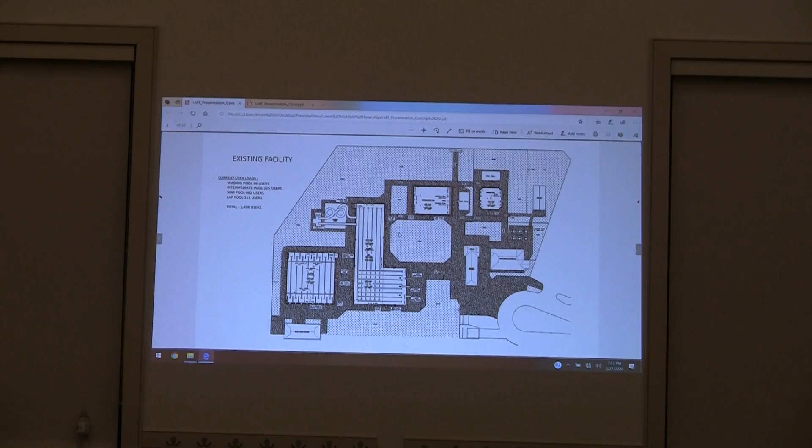Okay Thomas, you want to? Here's your existing facility. I may ask some of the staff to jump in as we go. Currently you have your competition-style pool.

We actually address this one as the Olympic pool, and it's a 50-meter long course with a 25-meter. Yes, thank you. And Thomas, water depth in this pool, we're going from...

Water depth's what's called the leisure pool. We start at 2.6 at the stair entry end, which is on the right end of this slide, and we go to 4 feet on the left end at the center gathering point. Here's your children's pool.

Currently you have a user capability of 1,498 users. On many of your days, your total user load exceeds that number. It may not be all at one time, but throughout the day, you'll have total patrons in excess of that. So overcrowding is one of your issues.

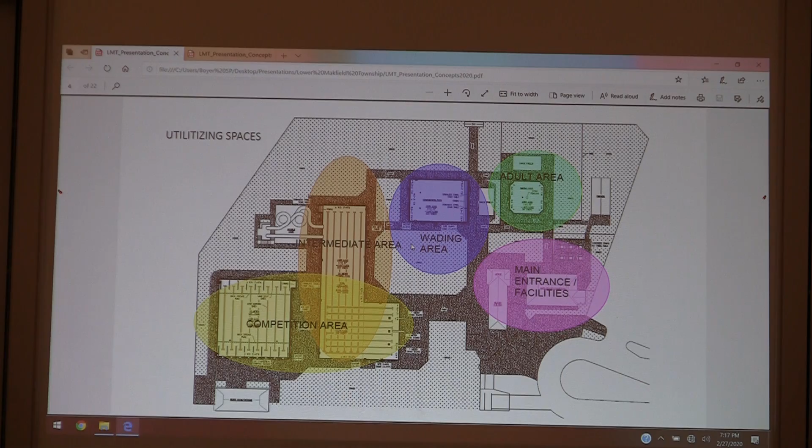Okay, so we'll move on to the next one. So what we were doing here, we're adding into this pool additional lanes. Your pool is already built to accommodate lanes running in the other direction.

So we're using your infrastructure here and just adding additional lanes across, which gives you more options for lap swimming or for competition and so on.

How long is that distance going that way? 25 yards, you have 25 meters now. How many lanes would fit? I think we have 8 both ways, don't we, Thomas? Yes, you have 8 in both directions. Going this way we stopped at your stairs, of course.

Jackie, you look like you want to say something.

We currently have the capability of doing 8 lanes when we run meters, but we don't actually put in 8 lanes because we leave a double wide swim area. By doing it this way, we add an additional lane space, which is one of the things a lot of our adult population was looking for, to be able to swim laps.

Will you still be able to do walking after that? So instead of dividing into adults and families, I'm an adult that swims laps, and I have kids, so I care about both. Well, I haven't seen this either, so let's let them continue.

Is the point of this that we're at end of life on the current pool? Is that why we're doing this? Are we saying that repairing and maintaining the pools is not feasible? I just want to let you know, no one on camera can hear you when you ask questions out of turn, so I want you to understand that. Is there any background to this, unless I missed it?

We are trying to remain relevant. What we know is that other townships are closing their pools because they didn't do the proper maintenance they would need to do in the long term. Our pools are getting older, so we need to review all of our internal, external, and stay relevant so we can continue to have a good membership in the long run. So that's why we started to move forward with this project.

Can I ask just one quick question while you're there? Did we do an RFP for this and get multiple bids?

Yes, we've been working on this since 2017. This was RFP'd last January.

Okay, where were we? Thomas, we want to move on? I have a quick question. In the Olympic pool, the 50 meter, will they lose that 50-meter course because of the inputs of the different activities, or are those able to be pulled out? Like say when the swim team would want to use 50 meter, or there are many adults that sometimes swim that 50 meter.

That's a good point. Thank you, because I forgot to mention that. Can you repeat the question into the microphone? Sure, the question was, are these features in this pool taking away the competition or long course swimming?

These are all detachable. They're tethered to the floor. It does add some movement and a little bit of work that you would have to move them out of the way when you do that. This and these.

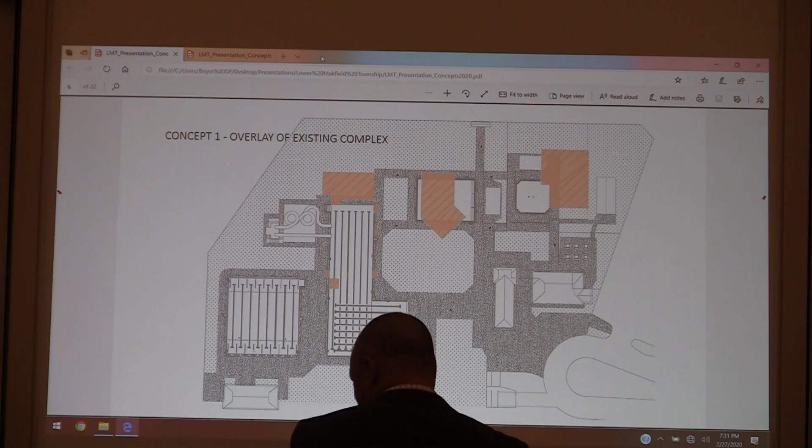As you see on the overlay, there's a large grassy area in the center of the existing complex. If we page back one, that grass area has been taken over by a new concrete deck area, which expands that seating area. There's additional shaded area created in that. So to answer your question about additional seating, we definitely have accommodated that in this concept.

Okay. Concept 3. Concept 2.

Your complex was extra hard to design. We spent a lot of time trying to figure this out, and because we're trying to keep so much of what you have so that you're at prices you can work towards, the next concept 2 and concept 3 don't change radically. They change somewhat in their form.

Here we retained your existing slides, which would save you about $300,000 versus the other slides we dropped in the other concept. And you lost your floatables, moved down to this area instead.

You still kept your water walk. You have the same basic zero entry. This pool didn't change. Here we changed the form of this pool—instead of a larger wading pool, you now have a splash pad on the back.

Does anyone have a question what a splash pad is? Okay, it's just flat pavement with sprays that come up through. There's no standing water. Okay. Kids love it. Yeah.

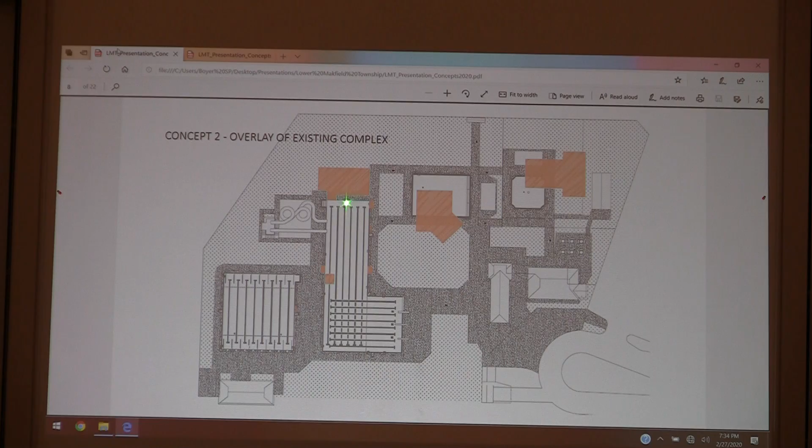You can go to the overlay on this, Tom. Here you can see changes in the overlay. Okay.

Next concept, different layouts again. It was very hard again in this to arrive at these because of keeping in place what you have. You have so much there that most pools don't. Most pools or complexes don't have four bodies of water, and yours is made even more complicated because they're all on different levels. So to stay inside your footprint reasonably and meet the mission goals we had, we have varying designs on these.

Here you got rid of your large slide altogether. You have the fatter family type multiple person slide, and we'll get to these photographs in a minute. Splash pad on the side, and again a different configuration for your other pool.

Let's go to the overlay of that. You can see the difference in the footprint again. Then go to concept four.

What we did then here is the addition of this type of, it's a FlowRider pool. We got rid of your addition to this pool and replaced that with, do you want to jump to that slide? That's this type of pool added in.

Okay, let's go to the features then, because I know you all have more specific questions and comments, so we'll try to jump ahead. We can always come back to these.

We have different color palettes. Beauty is in the eye of the beholder with these things. We have a lady who's an interior designer who is very good with them, we feel, but these choices can be amended at any time. Color palette is always subject to change.

Here you can see, around your wading area, you have fencing at different places to keep the kids in place. You can have an option of deck treatments around rather than just your standard concrete decking. They're colored and textured. Some people call them cool deck, this is called sun deck. It's different colors and palettes, and it's very easy on your feet.

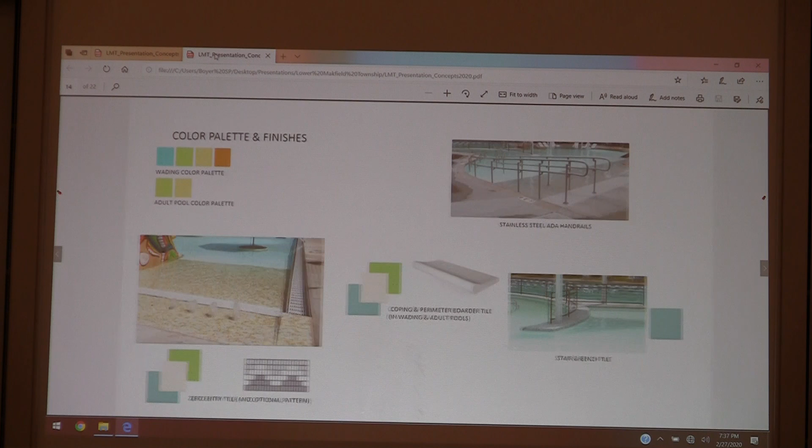Throughout the complex, we had different shade. These are shade kite type sails. You had sails over the adult pool and sails over the wading pool, because we actually have a lot of pools where attendance goes down when it's really hot if you don't have anywhere to get out of the sun. You get a little older, and I can testify that you don't want to be in the sun quite as much as you did before.

So here, this is what your ramp down to your wading pool would look like. It's beach entry. You have the different style slides and so on that would go in there.

These are in your adult pool and your larger pool. Your handicap ramps down are adjacent to your beach entry. In a wading pool, you don't have handrails. It's part of the code that wading pools do not have handrails. It's purely beach entry, and the basis is that kids want to play too much on them. It's not age appropriate.

The benches that are built into some of these features have tile and separation barriers in the other pools so that you keep people more in place, where you don't want kids crossing over to deeper water and so on. You use these types of things.

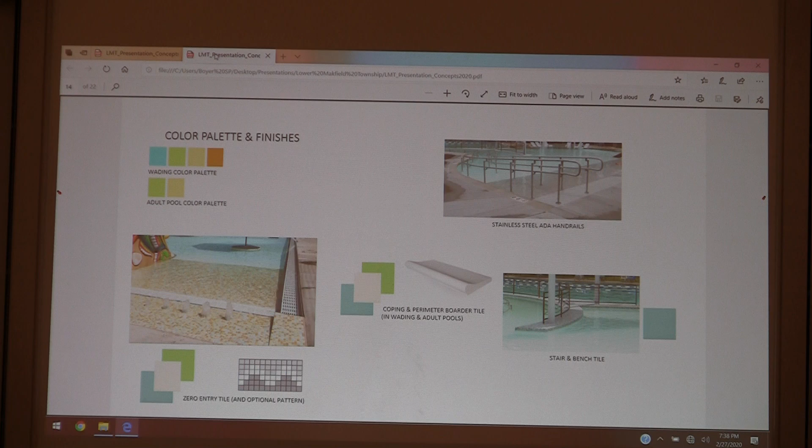Go ahead, Tom. In the adult pool, we have a lounge shelf where this is what you would lay on. We're often asked, do people fight over these? We haven't ever had that happen.

People tend to be civil, the guards and so on. We always tell people you don't want to get everyone in the habit where they go there in the beginning of the day and lay their towel and think they own it all day long. Everyone has to be a little civil, but they work pretty well.

They're very relaxing. In the adult pool you have in-water loungers, and also wall sprays. It's relaxing to hear the water and see the movement, and it also helps churn the water, but they're decorative and nice, and you can walk under them if you're an adult. They're just very pleasant to be around.

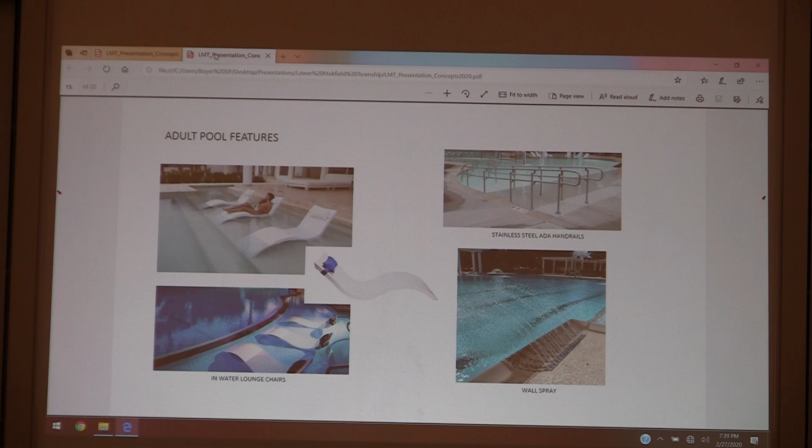In your wading pool, you have a family type slide, so if you're a parent or grandparent, you can hold your toddler and go down the slide into shallow water. Again, you're in 18 inches of water here, and all of these are actual pictures of pools we've done. So here you have steps down next to it, and benches where you can sit. You would have shade over yours, and more wall sprays.

On the beach entry, you have bubblers and play features. These are foam rubber with a vinyl skin over them. They're very resistant, very hard to damage, and there's a lot of things for a lot of kids to play on and do. Then the lounge shelf in that pool, you sit more upright in the wading pool so that you're up watching your kids better.

What we're calling your intermediate pool, your large L-shaped pool, you have these tall features in that addition area. This is that fatter slide you saw, more wall spray, and these are the floatables. They come in all different sizes. They're actually hard to get on and stay on - they're a challenge, and kids love them. Adults love them too.

This is the type of slide that's an option to keep your space open. Whereas now you're losing space because everyone's discharging into the water, with this you can discharge into your own run out.

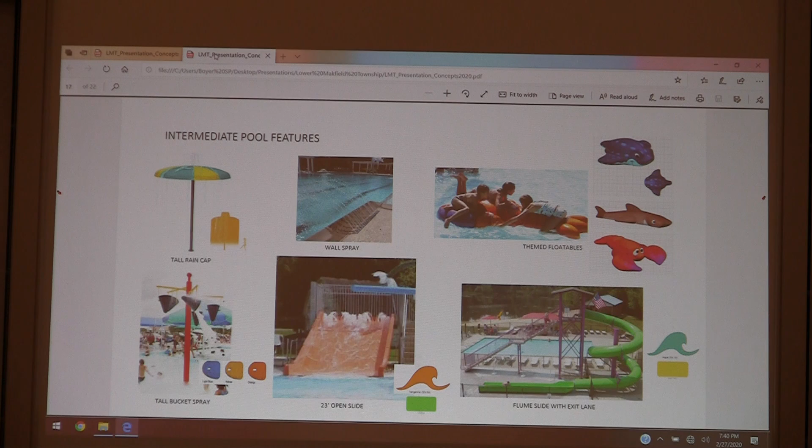This is the water walk we were talking about that stretches across that L-shaped pool. So you try to stay on these - they're tethered to the floor with stainless steel chains with just a clip. You just unclip them and you can move them out of the way.

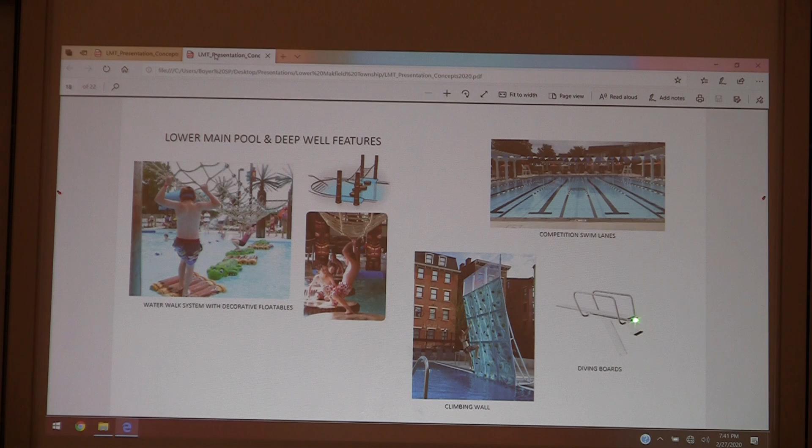You try to hang on and make it across, and that's a lot of fun. There's a different version of it. All these things are themable - you can come up with a theme, whether it's animals or flowers, or mix it up. Climbing wall from the deep well - we're keeping your diving boards and the competition style lanes.

And then the flow rider, which you saw, which we wanted to throw in there if somebody had a desire for that. Again, they're really neat, but they're really expensive. I'll say this though - if you went with this next to that pool versus the addition, you're probably at a net gain of about $500,000, because that addition is about $500,000.

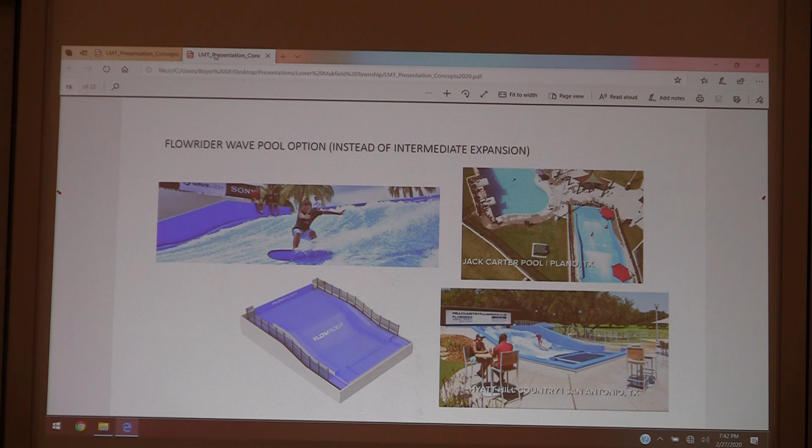And then different site considerations - low maintenance plant barriers, retaining walls, a pergola over the cafe area, different site improvements that you can have to dress things up. Do you want to go back to concept 1?

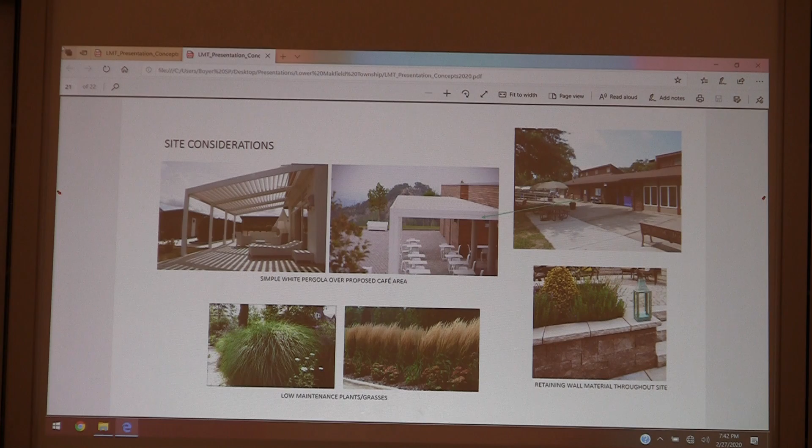The other thing behind these concepts is that you can do them in stages. I'll give you some numbers now.

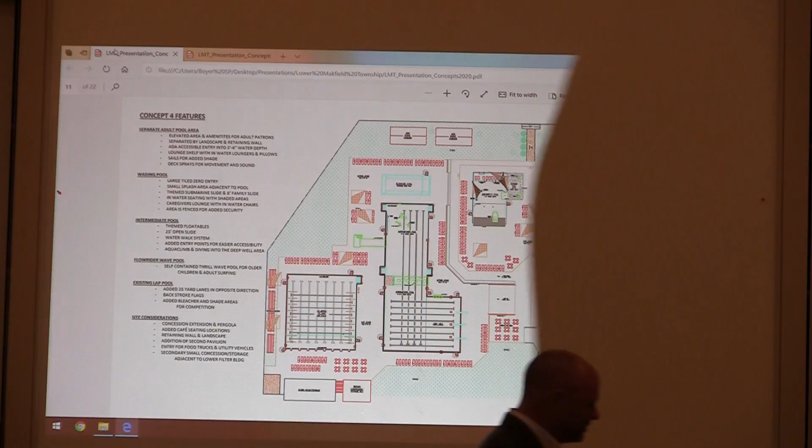This pool - geez, I don't know if I can, you're asking a lot, Monica, to make me do this. This pool, with the bleachers, you're at about $150,000, because you're not doing that much to that pool. If you didn't have the bleachers, you're only maybe $50,000 to increase the lanes, do the paintings, do the other work, and so on. So not a big investment there.

Since you're done with your concepts, can I now ask a question about that pool you were just talking about? Yeah, sure. The one area is deeper, so how will people be able to walk if you change the way the lanes?

Well, you don't have to put the lane lines in - we're not changing the depths. Those are just lines that are painted on the floor. Oh, okay, so your pool, the bottom didn't change at all.

Excuse me, as a follow-up to what she just said - I looked at all the designs, and it appears the lines are going the short width, not the long width that it currently goes. If you're a lap swimmer, you follow those pool lines, that's how you swim. You also use the overhead flags, which go the opposite direction of the lane lines. So is there a reason why in all three proposals the lane lines are changing to the short width and not the long width that lap swimmers and walkers want?

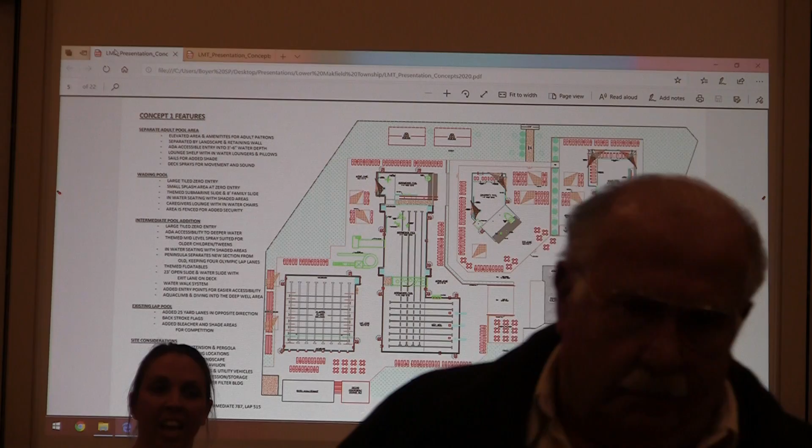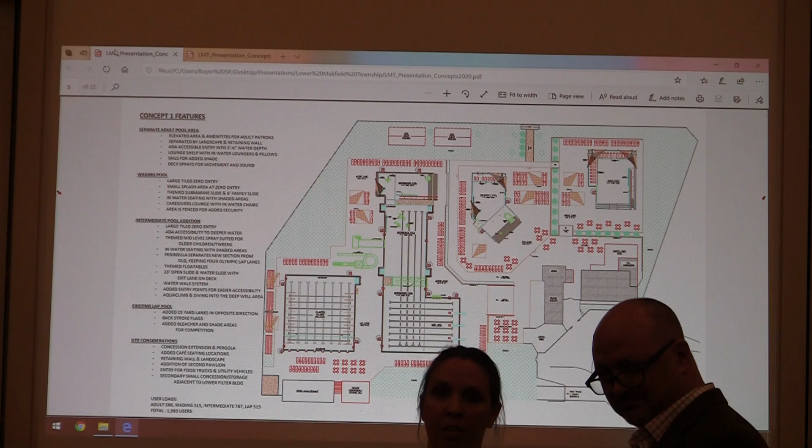Monica, could I just pass the mic to them instead of having them all go up there? Well, it would just - let me go through your numbers before you do that. I'll just finish the numbers? Brent can finish his presentation first.

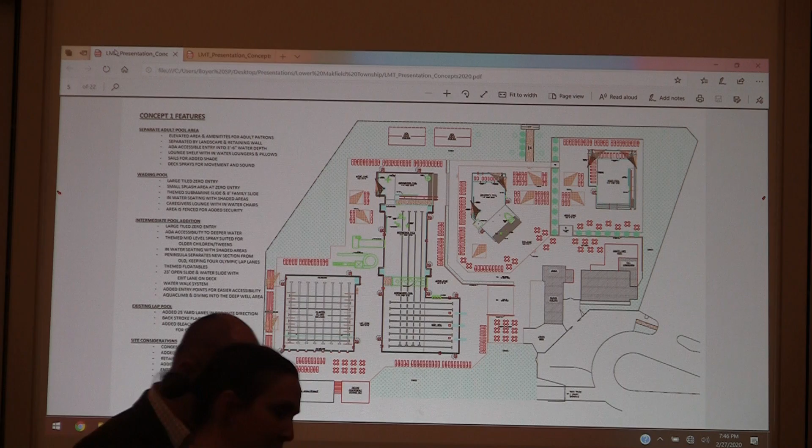So you have food for thought on the costs. I'll go through that. This pool, with the addition, you're at about $800,000. The slides, the two new slides, add about $300,000 to that if you go with these slides. Is that the 800 or is it addition to the 800? In addition to the 800.

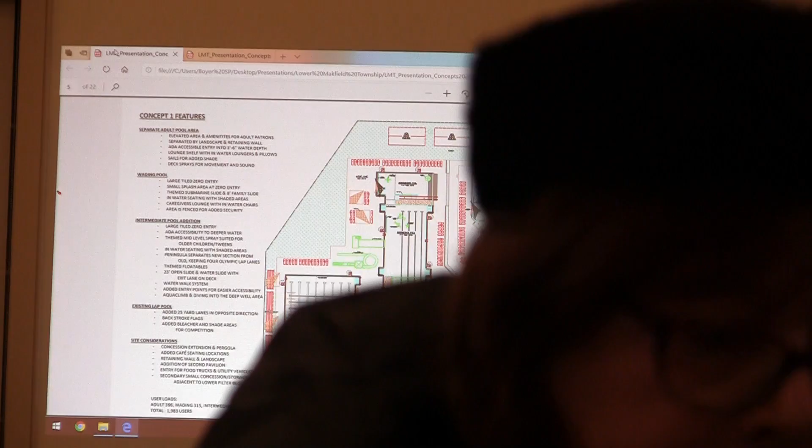This pool, with the site amenities, to construct new, about $600,000. This pool to construct new with the site amenities, about $550,000 - with all the site work.

But the idea behind some of this is that this form of doing the work leaves you options - you don't have to do it all at once. This is meant to be considered kind of a master plan at the end. And again, don't get too emotional about it - these aren't things that are definitely going to be done. These are ideas, and we want to hear your ideas to think them through.

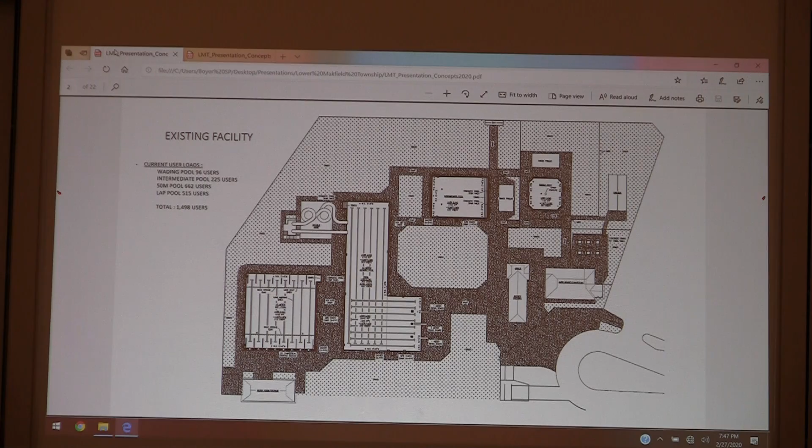Before we give you the podium, I want to mention - Thomas, go back to the existing complex. My pointer's dying, I see. The existing lanes run in here. Go to concept 1 now. I mean, they're still there, we didn't change them, and we didn't change the pool. We added these across, so they're just painted lines. Unless the staff puts the ropes in - and this was actually a requested feature - we added this ability to go this way. So you can still use it if they put the ropes the way you did before. We didn't change that.

Starting blocks and everything stay the same place for the swim meets and stuff? Yes, and that's - I'm sorry?

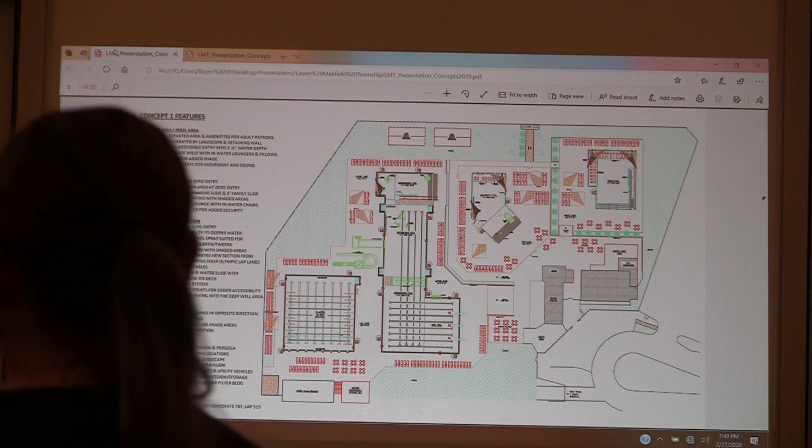So part of the intention behind the design right now with the lap pool and the lane lines going in the direction that they are currently showing using the yards, part of the intention behind that is so that we'll be able to program the shallow end of that pool alone for swimming lessons in the evenings to allow the other spaces to remain open. That's the intention behind it.

So it wouldn't take away lap lanes. It would just utilize that shallow, wider area where we could then put lessons in so that we are not impacting the rest of the pool space, because you are correct, that is something that does happen every Wednesday evening and when we first open on Saturday mornings. So that is something that we took into consideration in turning the lanes for Wednesday evenings so that with swimming lessons we would be able to have them and not take away pool space.

And also making sure we still have the flags going the proper direction for lap swimming, as well as having enough lanes with the same amount, being able to put 2 or more lap swimmers per lane. They're not single lanes, having lane lines on the bottom of the pool, directional lines, as well as the directional lines for meters for our swim team.

Okay, I have a couple of comments. One is, I'm one of the non-resident Lower Makefield people, and from my standpoint, compliments of Cheryl sending the email to me, that's really the only way some of us knew about this meeting. So I would ask that communication be to all of the pool members. I've been a member for over 5 years, so I would hope that I would receive all correspondence.

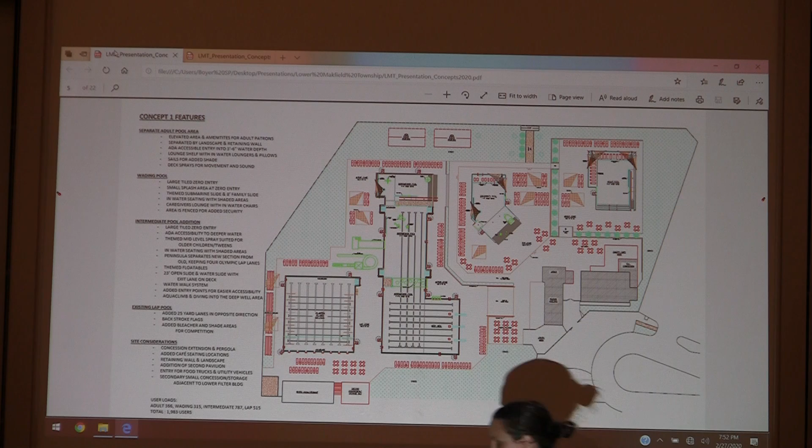Secondly, from the standpoint of being both a lap swimmer and a walker, because I do both, and that is the length-wise, although it seems very reasonable to you all to move it, there was some discussion about that last year. It was very negatively received by all of the lap swimmers. So my feeling is that the lap lanes should remain as they are, because from the standpoint of being a lap swimmer, the number of times you will have to flip in comparison to what you have to do now is doubled.

So it's really not a reasonable thought, and like I said, it was discussed briefly, and I thought that had been put to bed. And from the standpoint, I think that's an awful lot of expense to split the walkers and the swimmers, because there's a lot of people that adults do both walking and swimming, and with being separated from the kids, that's kind of what everybody likes. It's interfering with the socialization.

Yeah, I just wanted to say that if you're separating the lap swimmers and the walkers and the exercisers, you're interfering with adult socialization, because those people socialize back and forth, and as Peggy said, some people like to do both, so you would have to go from one pool to the other at diagonals in the complex. Also, what has happened to the picnic area, because I've seen that utilized quite a bit. It's not something that I use, but okay, all right. But if you could address the separation of socialization between the adults, that's an important thing to me.

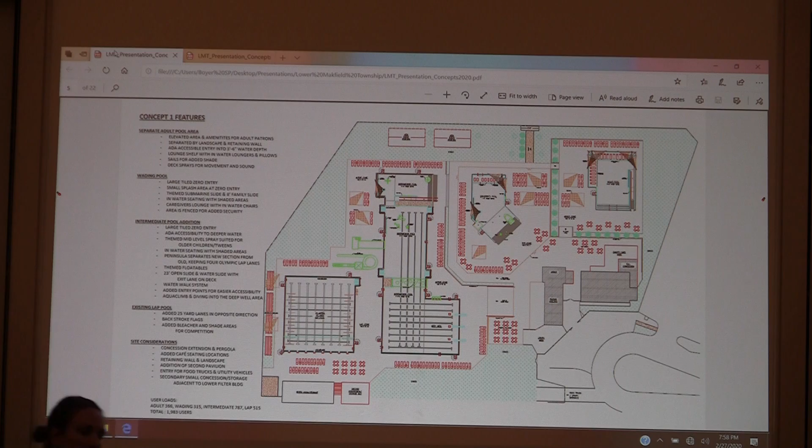Thank you. So first of all, I just want to say I've also been a member of the pool for like 30 years. It's fantastic, it is an asset to our community, absolutely wonderful, okay, so keep it up. I know there are issues all the time, but it's fantastic. I am a lap swimmerish type person now. I've gone the whole gamut from being single to having little kids, to bigger kids, to teenagers that didn't want to go, to adult children that are gone. So now I'm back to lap swimming. But again, the facility's great.

Regarding the lap swimming, I don't think it's going to change anything, but possibly give us slightly more lanes. It's just there might be some confusion - you're 25 yards versus 25 meters, so if you go the other way, you'll have more lanes, but you'll swim 25 meters instead of 25 yards. No, not at all, no, okay. Anyway, I think there's some confusion, that's all I was going to say there.

The one request I would have, if I could, is that what I've seen over the years is there are more - I'll say adults, but I really mean from like 18-year-olds and up - that are not swim team people that want to use the facility for exercise. And it's more and more, and it's a good thing, it's like a wonderful thing. So I would just ask that if that could be taken into consideration, because currently, even when you have the lanes set up, as we said before, multiple lanes are used for other activities, whether it's lessons or something. And in the evenings, I see it actually getting fairly crowded with people in 2 lanes and then people waiting. So it's another great benefit of the pool, is people are using it for more and more exercise, there's more adults there. So if you would just think about that as you go through your designs.

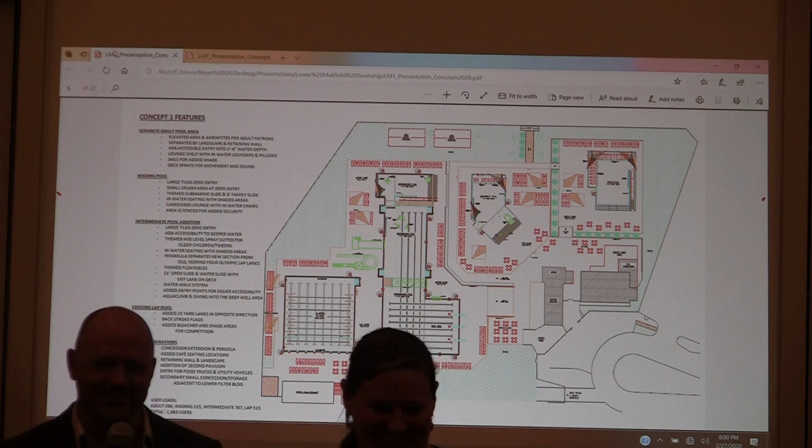Yeah, typically you would do this in the off-season. If you did a piece at a time, you could easily do it in the off-season. If you tried to do it all at once, honestly, you'd have a chance that you'd lose the season because it's a lot of construction to do all at once.

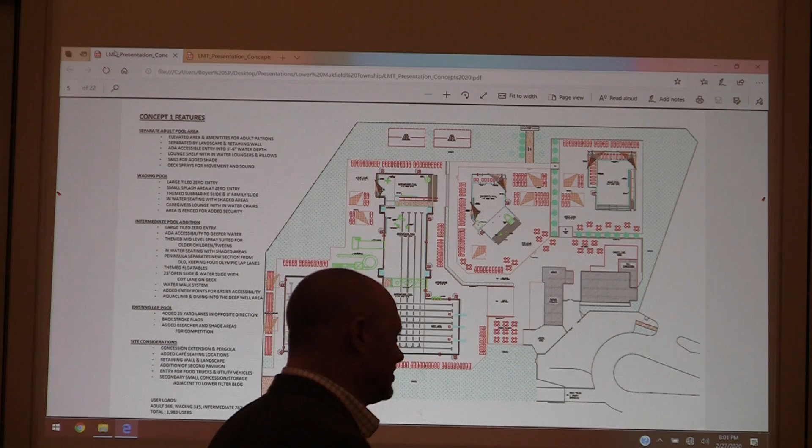I have two questions. The first one is, I may have misunderstood, but there is a cost to the lap pool. I don't understand why there would be any cost to the lap pool at all other than buying new lane lines and maybe flags. That would be my first question, because you're not doing anything to the pool that I know of.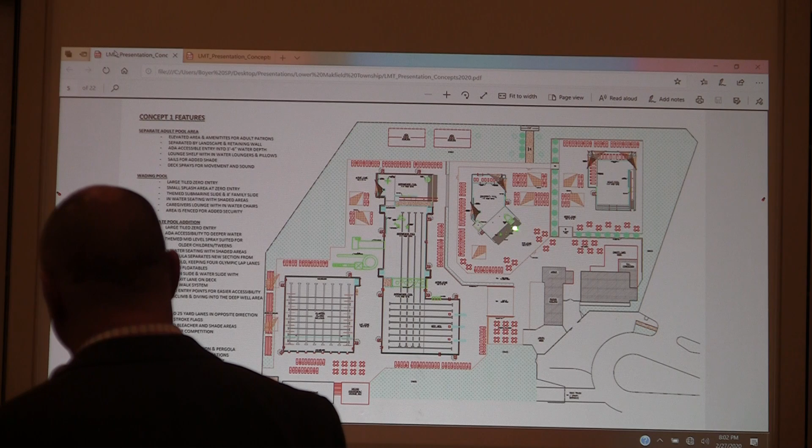My second question is, I don't know if anybody else agrees with me, but we're putting all this stuff in for little kids. We've been members since day one of this pool. Kids came, they played, they made up games, they had a good time. I don't understand why we need to have all of these play things for kids that are interrupting with what adults or teenagers would want to do at the time. The only real things that we're putting in for what I would call kids is this pool. All of these things are for young adults through adults.

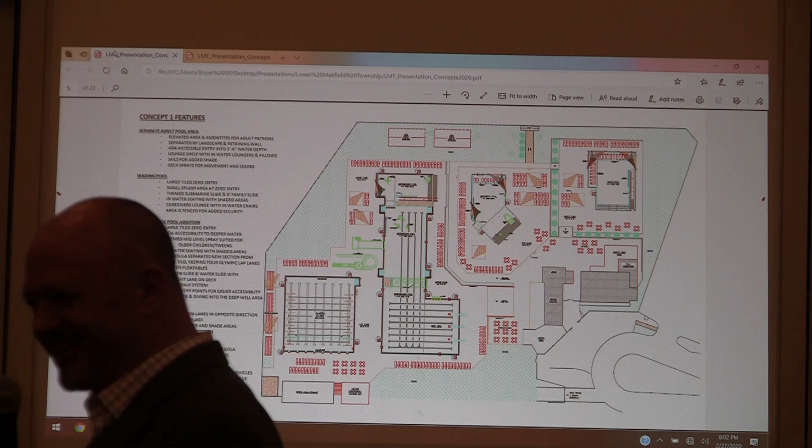You'd be amazed, and when I was growing up that was true, you only had the normal pool with nothing in it, and you learned how to play with that. But the expectation of the public and the things that are available is different today. The old style pool is just a black and white TV set now, nobody wants to go there. I love black and white TV. Yeah, if you're a classic movie fan, yes, that's true. But it's really for young adults through adults, all these other features.

So just so people know all the information on the video, and to your point, it is standard. He's right. We moved down to Dallas for two years, then back up here, and the pool facilities down there, it's ridiculous compared to here. Not that there's anything the matter with the pools, it's just way different.

I think it's a great idea that you've gone out and done this study, but I do have a couple questions. I understand the seating at the lap pool. Does that eliminate then the lounge seating? What about the bleachers? Will that impact the bleachers on the left-hand side of things?

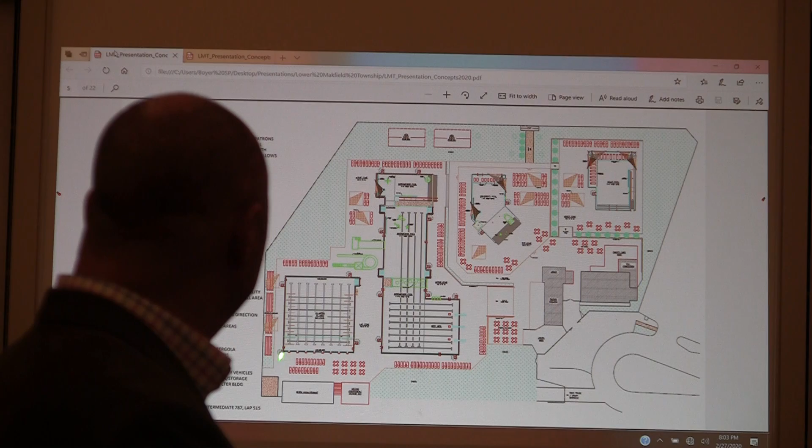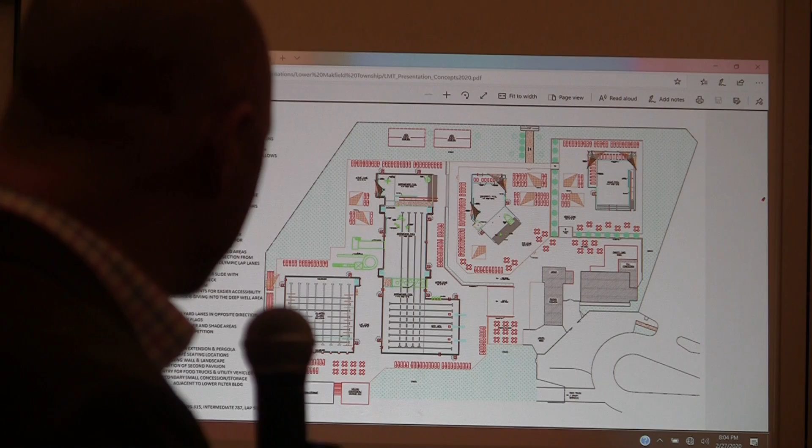Are they permanent? They just moved the lounges to there, you can get either or, because that's where tables and chairs are now that are used on the other side. You can get rollaway bleachers if that's the choice, yes. Everything else around there is that type of seating, but with the competition, that was one of the things we found doing interviews with the staff, and a lot of this is not just our thoughts but the day-to-day problems. During a competition you don't have bleachers, so that was put in there as an option. They could be a rollaway though.

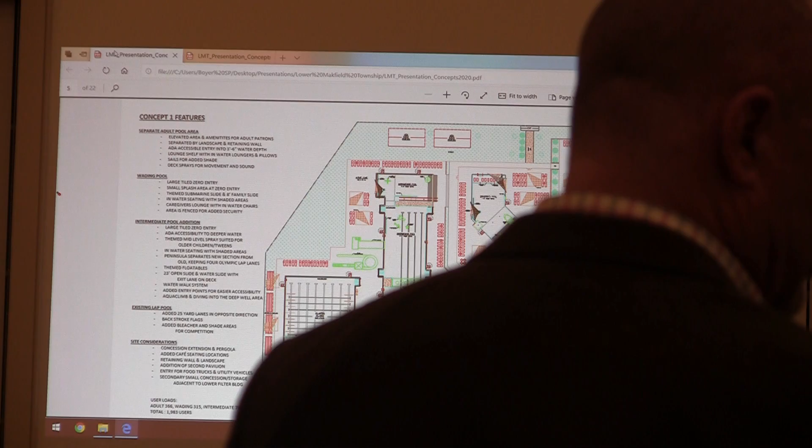I question the whole issue of having bleachers because we have bleachers. When my daughter was on the swim team, when my daughter was a guard there, during the swim meet there were bleachers. Rollaway bleachers were installed. I believe they were four rows high, and they went the whole length of the pool. Are we saying that those were no longer available?

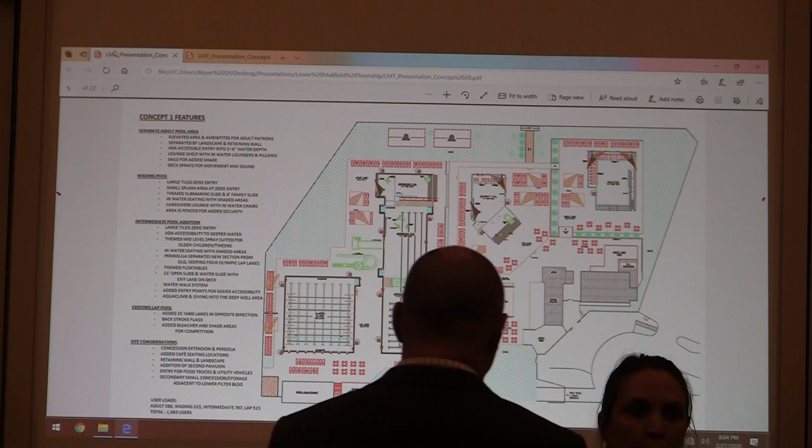We actually pull those bleachers from other facilities to be able to accommodate swim meets right now, so we don't have them assigned specifically to the pool. That's fine, that's the question, but I definitely recall bleachers. There were bleachers. You are not mistaken in that. Yes.

Okay, you had another question. Yeah, I know.

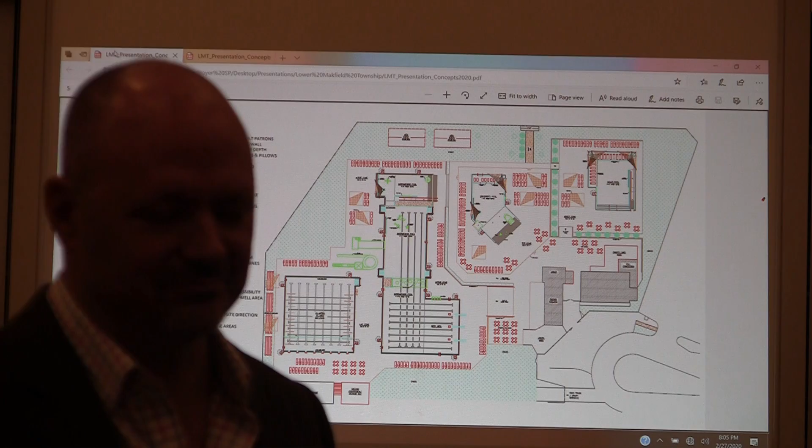I like the idea of some sort of handicap access. This has been something I was very concerned about in the last 25, 30 years. I've been a member since '81, and we lack that. I've seen parents have to dump their children into the pool from a wheelchair, and that just breaks your heart. So I'm glad to see that somewhere in there, there'll be better handicap accessibility.

My concern with the middle pool, to the right, is that the intent of that pool, of the water level, was for that swimmer no longer in the wading pool but not quite ready for the depth of the Olympic pool. I'm not sure that pool would still address that need for the younger swimmer not quite ready to take off into the deeper water.

This addition goes from 0 to 3 feet, which is, your current one is to 4 feet, correct Thomas? Correct. But how big is that? I don't know that I have a square footage to give you to compare. It's not quite as big, but it's meant to somewhat compensate, that intermediate type depth area.

That intermediate pool, I observe it as being heavily used, not only for the kids swimming but any pool. Yeah, it's very, very busy. And the theory is that you're going to disperse those people to these other areas now, because don't forget, the usage pattern is going to change. We didn't feel that we took anything away without giving them somewhere else to go, at least that was the idea behind it.

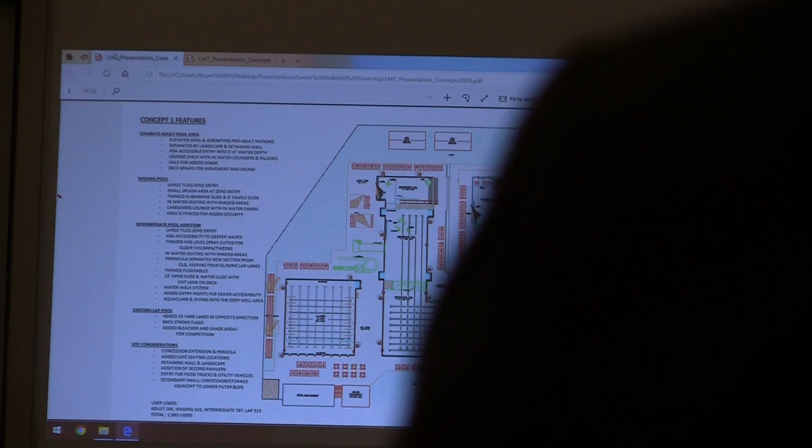In the lap pool, where the steps come in now, will you be making that handicap accessible? Will you be making that the walking lane? I'll let Jackie answer that. And if so, what are you going to do when you want to do your lessons? I'm not arguing, I'm just asking. It's gone.

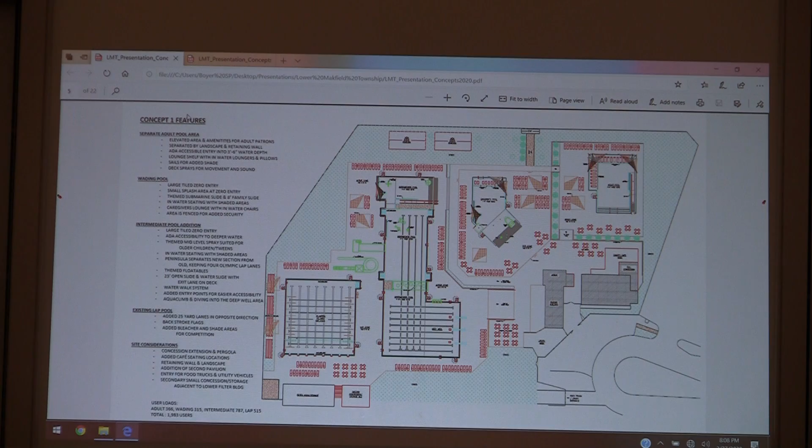So to answer that question, the walking lane would not be where the steps are. That would still be open, just like it shows in the diagram. Would you put it at the 5 feet? I would put it in the first set of lap lanes. So it would never be taken away, even if there are lessons? Nope, it would still remain. How would they access it, though, if there's lessons going on? We would have to figure out some logistical things.

First off, thank you very much for the opportunity. I do appreciate what you're trying to do here in this feasibility study, and you're looking more long-term. But I do have one question, maybe for the Parks Department.

What we're talking here, and you mentioned in your presentation, you were constrained on the limits. Is it reasonable or unreasonable to assume that you could expand the property of the pool? I'm thinking specifically of that one baseball field in the back. Not that I'm advocating that we do that. What I'm saying is if you're looking at a really long-term plan, this sounds like something that's going to be good for like 5 years. 5 years is not long-term.

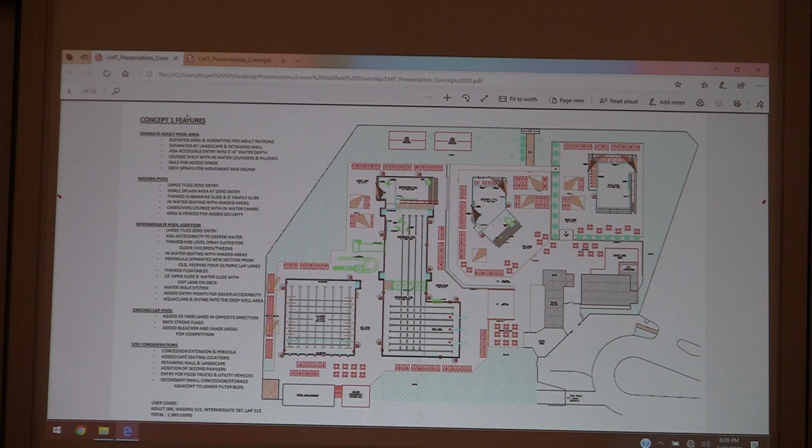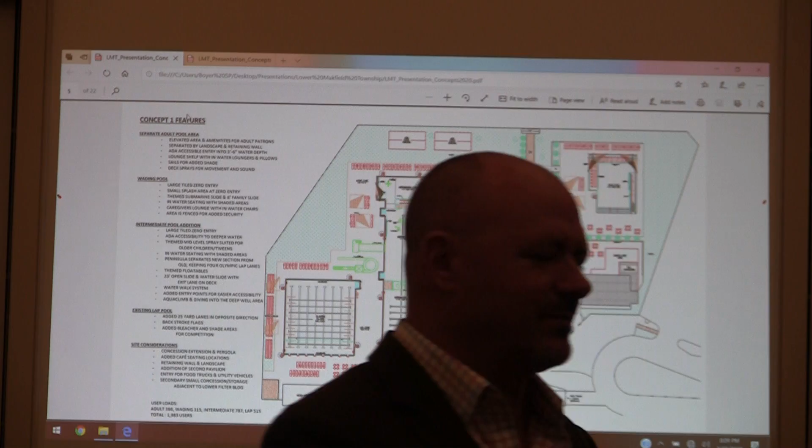I'm looking more like a plan over a 5, 10, 15-year period. You have one baseball field back there, and yes it's used during the girls' competition, but past that it's not used that much. I was wondering if there's consideration of expanding the footprint so that you relieve the constraint on the current footprint that this gentleman was talking about. And by constraint, I didn't just mean the footprint, I meant trying to reuse your infrastructure.

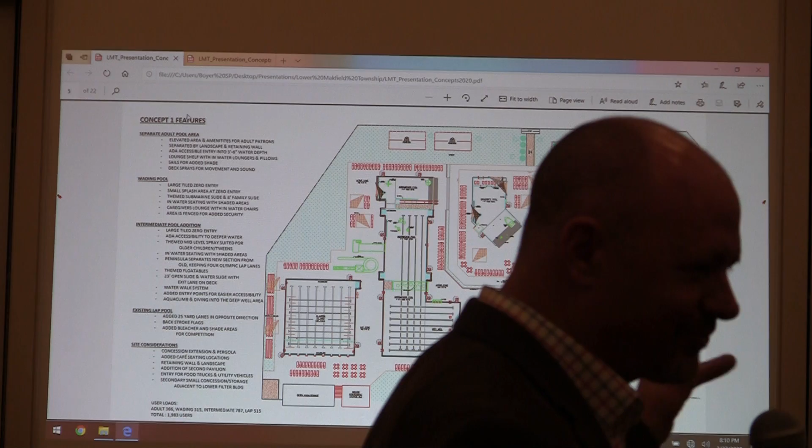The constraint being that the more we build, the more it costs. We viewed this as much more than a 5-year lifespan, but the further out you go, the further away you get from the bathrooms, from the concession stands and so on. We were thinking that we had enough space, but it was also a puzzle to fit it all together at the same time. But as I said, expand the footprint if it's reasonable and the township were to think about something like that. It might create opportunities that don't necessarily exist now.

You have to be very careful. There's some PAA folks in the crowd here.

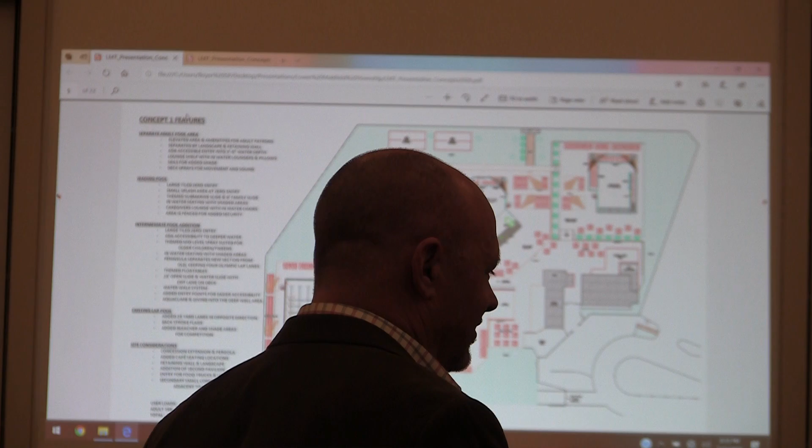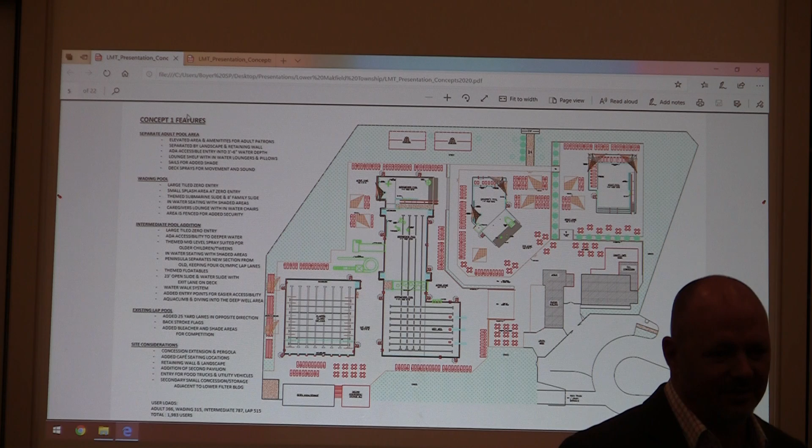I'm thinking out loud from the point of view of long-term planning. I'm not saying it's a final decision, it would take a serious conversation and consideration, but it's something that should at least be thought of. I don't know if anybody has really thought about that, because I didn't hear that. I'll tell you, that field is used more than you might realize. If we were to take that field away, we'd have to come up with another creative solution in the township for PAA to be accommodated.

Fine answer, I just wanted to know if it was being thought of. We are doing a full long-term plan, hopefully in the near future, for the park in general. That could be something that could be incorporated potentially. I'm not sure if it's going to be considered or not, but now we know it's a concern. It is something we had at one time thought about. It has been mentioned by one or two people.

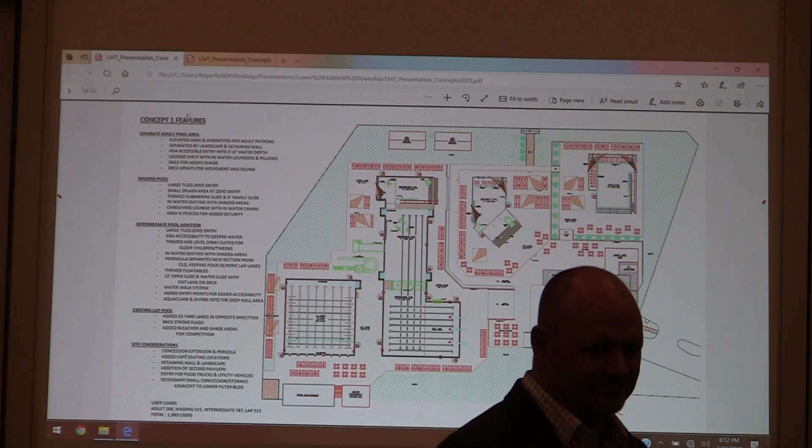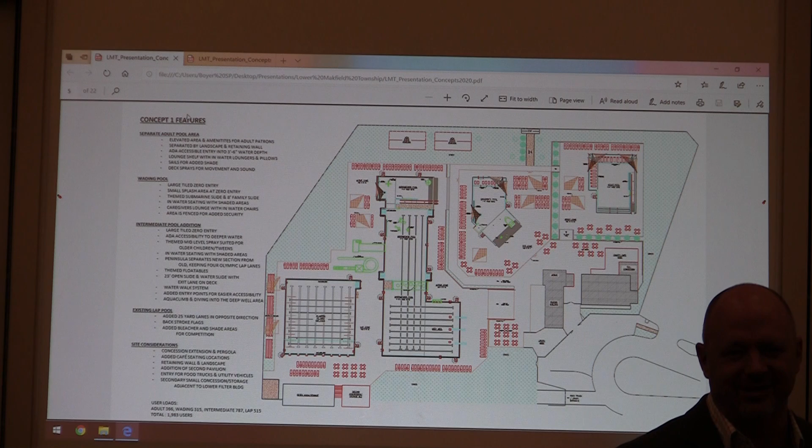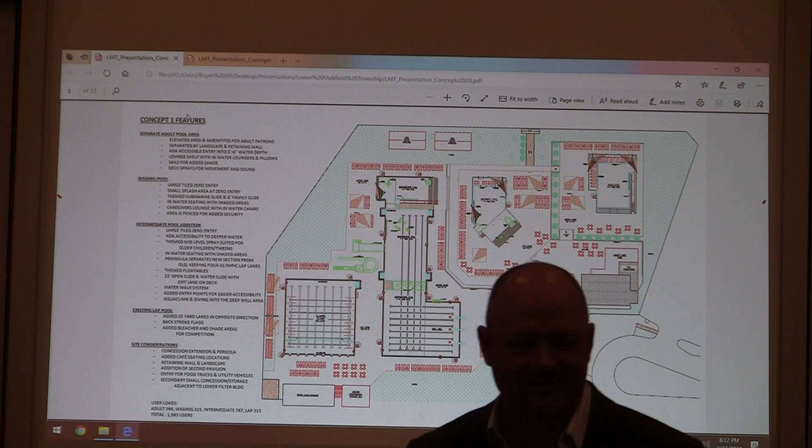That idea was explored in the early 90s when the lap pool was being considered and built. At that time it was determined that because of the lack of fields you couldn't go into it. I think there were other issues too, I don't know if there's a stream back there or something, but there's something else back there that impacts that.

So we didn't feel we couldn't accomplish our mission within the footprint. It was just complex. We never really asked to go beyond it, so we thought we were okay in there. Whether we really accomplished our mission is up to all of you, but we felt we were pulling it off. Hold on, the man in the plaid has had his hand up for quite a while.

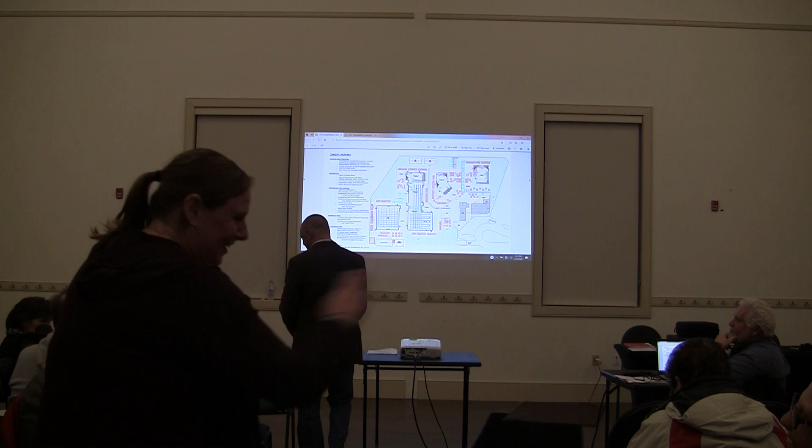I really have two questions I guess. When the swim teams meet, in my experience the last 10 years that's been Tuesdays and Thursday evenings, you basically lose that pool from about 4:30 for the rest of the night. So when we're doing all this discussion about lap lanes, we're talking about two days we can't use it now, and you haven't really given them any other place to go. You can move us, the adults, somewhere else, but I don't think you've addressed that. You've given people some bleachers, which is helpful, but that means they don't go into the big pool area.

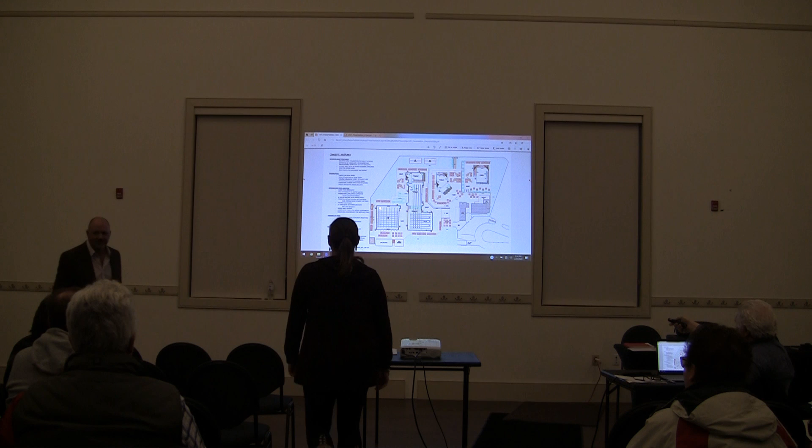My second question is, I'm an avid walker, and it looks like you've put the walking lane pretty close to the deepest end of the current lap pool, which won't necessarily be amenable to a lot of my fellow walkers. Is that the walking area, where that blue line is? No, that's the walking lane, which is your shallow end. Oh, okay, the shallow end, okay.

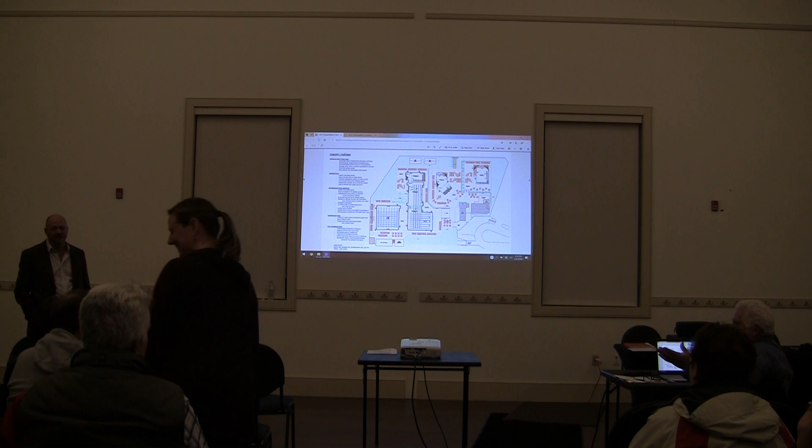Adult pool is 3'6", so it can also be utilized for that. Yeah, I have no objection to being moved to a totally different location, as long as you give the 50 or so of us who like to walk a place to be.

This pool is 3'6", it has stair entrances, you could use it. So part of the feedback right now is to relocate some of the walking over to the adult pool in a 3'6" area, to accommodate multiple people looking to walk at once instead of the constraints of a lane line. The additional answer to the first question is that we will still put lap lanes into the Olympic pool. If we have a swim meet and need a few lanes for swimming, just like we did last summer and every summer before, we add those lanes by closing a diving board and relocating the lane lines into that pool. So that won't change our capabilities. Our new gutter system still allows for the same flexibility in how we program the pool.

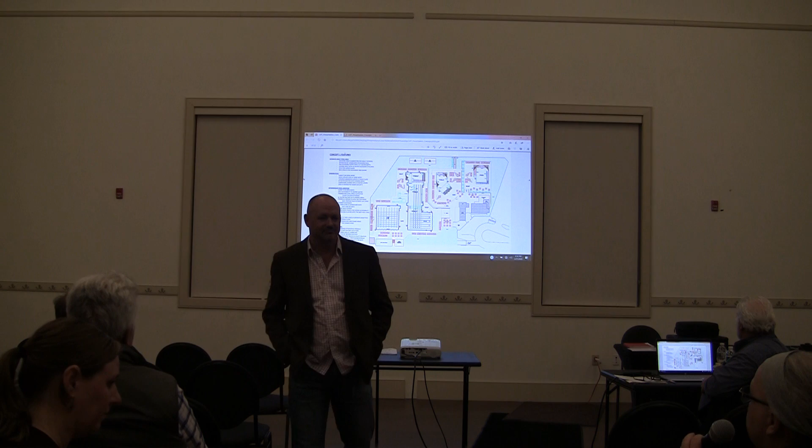A simple thing I've noticed, I've been a member for 25 years: I don't feel we have enough tables and umbrellas for people. You're out in the sun, and unless you have a small child in the intermediate area where there's nice covering, you're out in the sun. I thought that would be an inexpensive addition that would be very helpful.

And that is a big part. We didn't get into counting tables and umbrellas in this phase, but we gave you more deck space, so you'd have the potential to add those in.

Okay, coming your way. Thank you.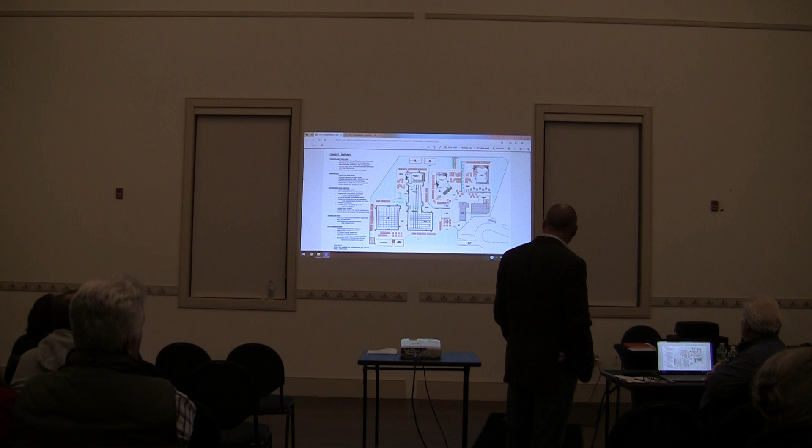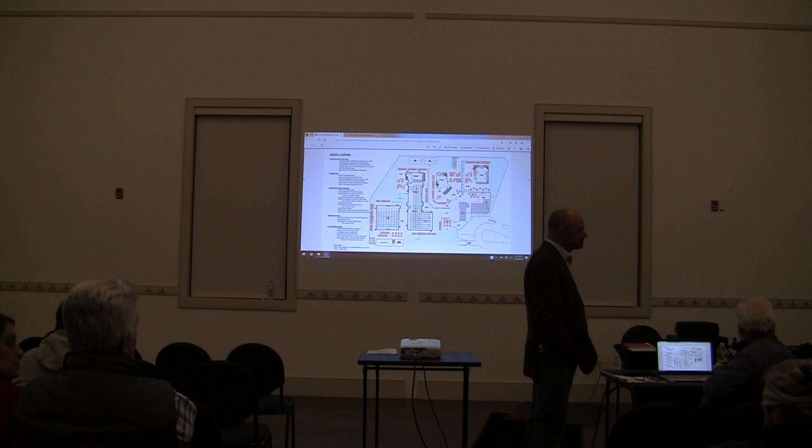I have a few logistical questions. Around the adult pool, in the grass area, today there's a lot of trees, mostly outside the fence. Will those trees have to come down for the sun to get in, or are you thinking to leave those? There's heavy shading from big trees right in that area. Would your thinking be that that pool area will get exposed to sun if it's not today?

I've got a bunch of quick ones like that. I honestly don't know. We might have to take some down. You could probably leave some there and probably replant. At this point, we were just doing layouts and concepts, which trees and so on, and how much sunlight you want to come in. I'm a tree lover too, but we'd have to consider that on a case by case basis.

Is that area still going to be elevated? Is that wall that currently protects the kiddie pool going to come down? Same question for the center pool going to the L — I know you said you're going to pave that, but are you regrading? And same question on grading conceptually, are you regrading back where the new picnic area is? It's hilly, so I'm just curious about regrading across — you're still on different levels, but there's regrading and recontouring going on everywhere around them.

Jackie, where do you want to go next? I'm not keeping track of who's next, I'm just alternating.

Hi, I have two questions and a comment. The first question is, as a little old lady who is always freezing her ass off when she's trying to get her laps in, are you going to fix the heater in the big pool? The second question is, what is this going to do to our membership fees? And the comment is, as a little old lady who's always freezing, please don't cover the pools, I need the sun.

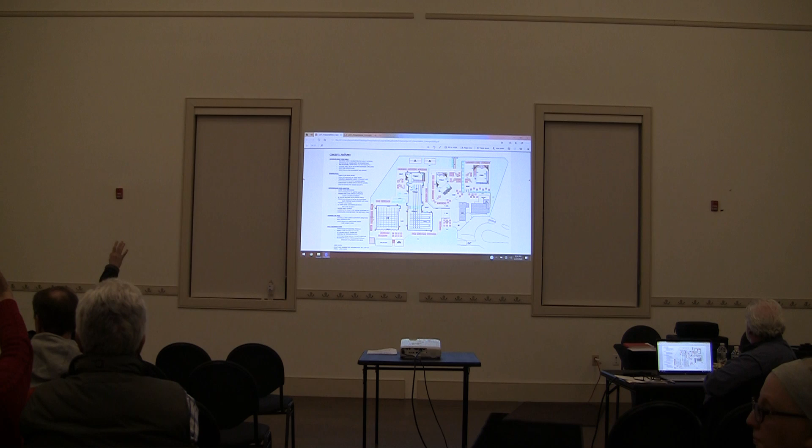Hi. So my recollection, we've had many decades of enjoying the pool, but my recollection is that the current baby pool has fencing around it so toddlers won't stray into some other pool if they're not being watched. So will that new baby pool area be secured to prevent anything like that from happening? That's all enclosed, okay, so that was my first question.

Also, I think there's one person from the swim team board here, but I think if they haven't been consulted, they might have opinions about the long course pool and the lanes and all that, so they have been, okay. I think that's it, thank you.

I'm going over here, go ahead, since it was directed at swim team, I'll give it to you guys. So I am on the swim team board, so I have a vested interest in what's going on here.

First of all, I would like to commend everybody for what they're doing with this pool. I think it's great that they're trying to keep the pool up to date, make some changes. I just wanted to address the concerns about changing the lanes the other way. Collegiate swimming and high school swimming are all in yards. My son yesterday swam 14,000 yards in the high school pool for practice, going in that direction. So you're not doing more flip turns, it's not going to be a major change for you.

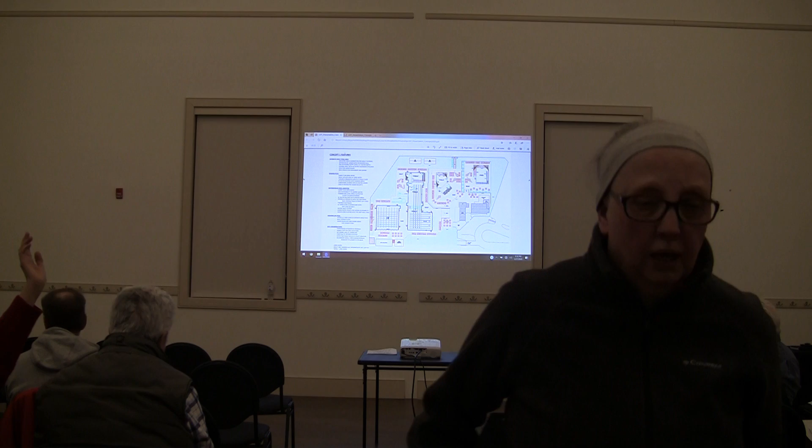Okay, who else? Two more, and then I'll be back over here.

Hi, again, back to the lap pool. I'm wondering what the restrictions are going to be for that lap pool. Is it going to be adults only? Is it going to be 16 and above? We have a granddaughter who needs a little extra care that doesn't necessarily need to be in the ADA pool, but she does need to have an adult help her. My daughter was using the lap pool with her and got into a confrontation with someone telling her to get out of the pool. I mean, she paid her membership as much as everybody else did. She shouldn't have been told to leave.

I'm wondering if there could be something, maybe they wear a special band that they're allowed to be there, something like that. She also wears appliances on her body that, to be in the larger pools with the overactive kids, could rip them off of her body and potentially be a problem.

That's all. So to answer the question, the operations manager, myself, and Monica, the Parks and Rec director, are in the process of streamlining and creating all of those rules for the lap pool. We have not gotten anything finalized yet, so that will come out prior to the pool opening, with structured rules for how the pool is used and staff training on how it's enforced. That's something I don't have any answers for you right now.

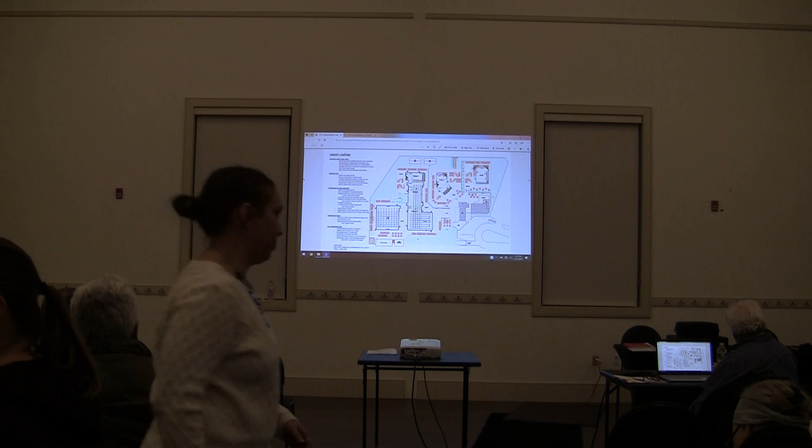Yeah, okay, hi, a couple of comments. First of all, I really like some of the features of all of the concepts, and I think a key point being overshadowed is that we do need to do maintenance and upgrades, not only to keep the facility at the level we already enjoy, but to keep it relevant. As a father of young children, my wife and I are always evaluating the best experiences we can give our children, and a simple box of water is not likely sufficient compared to an area with a lot of amenities focused at different skill levels.

So that's the first one. Second, I really like the intermediate pool being moved to the top of the L-shaped Olympic pool. I think that would have much greater utilization than the Wave Rider. I know there was one comment, I mean that's super cool, I would like it and I think my kids would love to watch me fall on it, but I think the pool itself would get much greater usage, as well as moving at least the tall twisty slide off of dumping into the pool. Which brings up, I know there was one other comment about liability insurance, and I wonder if our insurance carrier has been looped in.

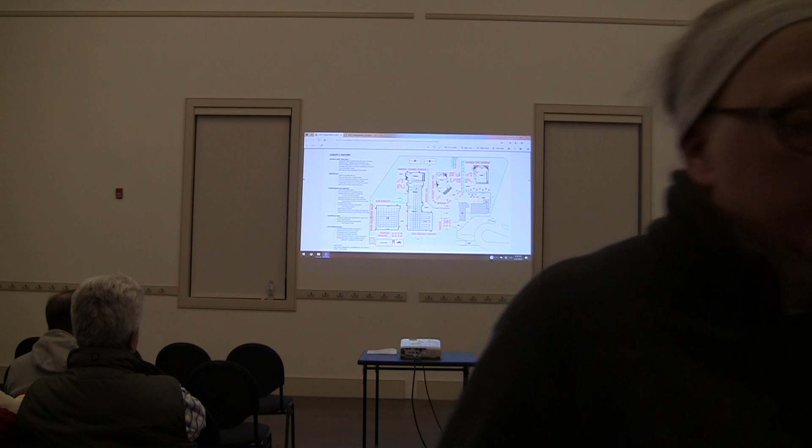Yes, I would love for you to. Thank you for the positive response. And liability-wise, you're really not a big issue, these are common things today. I think I looked at the pool budget, liability in general is really low, like $3 to $4 grand a year or something like that, right? Oh, that's it? Okay, great. If you look at this budget, it shows you all the costs for that.

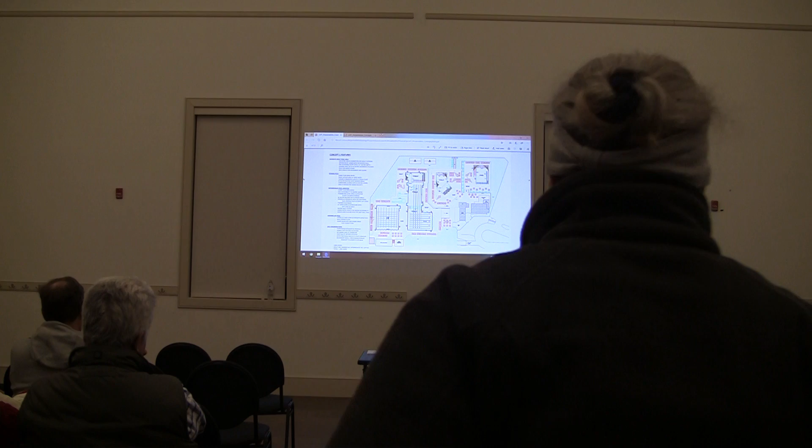Yeah, okay, go ahead. And just to continue on about insurance, we continuously do walk-arounds with our insurer, so they do full risk assessments for us every year. We made some changes this year based on the walkthrough last year. So I just want to let you know that's something that's very important to us. Safety is very important.

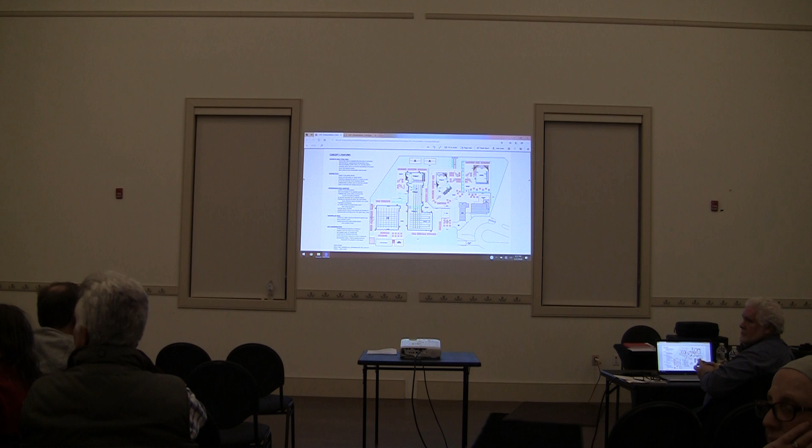Yes, before I brought up the fact that you were separating the adults so that it would be interfering with the socialization of the adults, and I didn't hear any response from you or comment on that. So it is a concern, I think, for the adults who are members.

I don't know how you socialize now, so it's hard to answer that, but I mean, you still got, in my view, I don't know who you sit with or where you sit to talk to them. Because you have people that swim laps, people that exercise, and you're separating them. You're having an adult pool at a complete diagonal from the lap pool, and they're all adults, and they're socializing like they're, people that swim laps come over into the walk lane and tread water after they've swum laps, and they talk with the people who are using walk lanes and treading water and exercising.

So you don't want them separated, they're friends. Right now, we don't have an adult pool. You don't want to add it? You're separating them as far apart as possible. Let's take the adult pool out so we don't. On the lap pool, they're not. On the lap pool, they're still walking, that I know, but your section is still separating the two pools, completely diagonal.

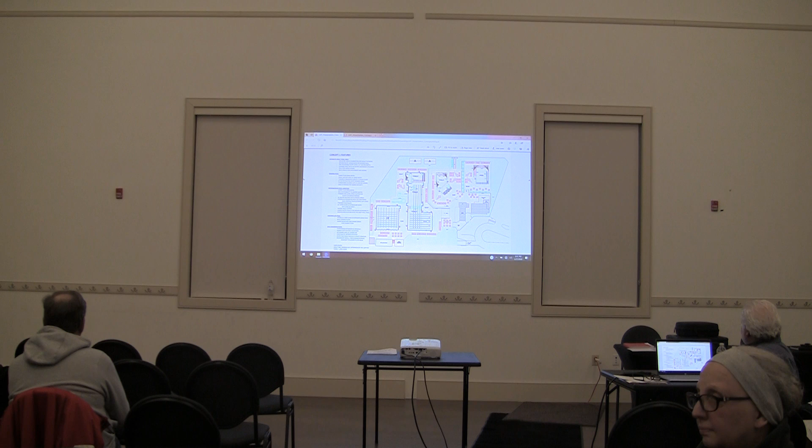So my question is, there's 3 different versions that have been posted, and as one gentleman said, a number of people weren't able to come. I just looked at the Lower Makefield Pool site, and I don't see any of the drawings posted. Secondly, before all of this is finalized, and maybe have additional meetings, but be a little more specific about what the topics are going to be about so people understand. When Cheryl forwarded me the email, I didn't even understand what it was about, and I know a lot of people call it the township.

So to answer that, this was the first unveiling. Right now, I'm the pool manager and I haven't seen it till tonight. It is being recorded. We got a video camera, so we are recording it so we are able to show anyone who is not here. But this is the very first time we are seeing it collectively as a whole.

So the intention tonight was for others in the community, everyone could see what we are working all towards, ideas on how to continue to grow and meet all the different demographics we have, as well as bring in more people in our local community that might want to be part of what we have here. So this is literally the very beginning stage, my first time seeing it as well. This is the start, but instead of us looking at it on our own, we were fortunate to bring a group together to share all at once.

So if you posted the drawings, now that this has been presented? I'm sure they will be. Posted the drawings and then gave people a venue, a method, whether it be a box or something, to comment, so you get additional comments from the community. I'll just say it's the same problem at the school board, because I'm involved with that as well.

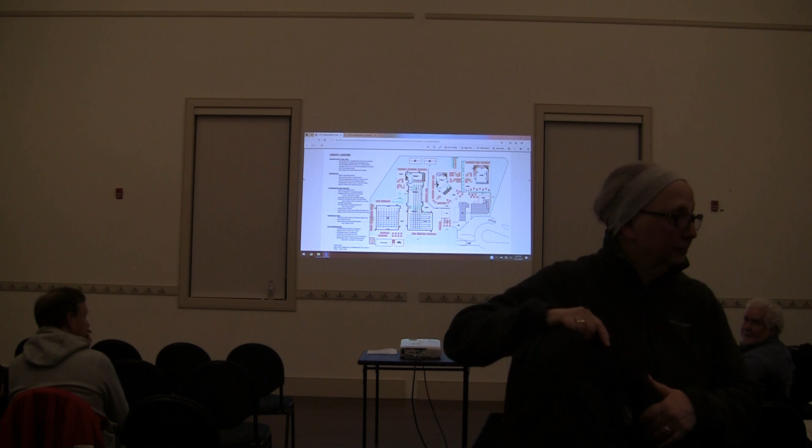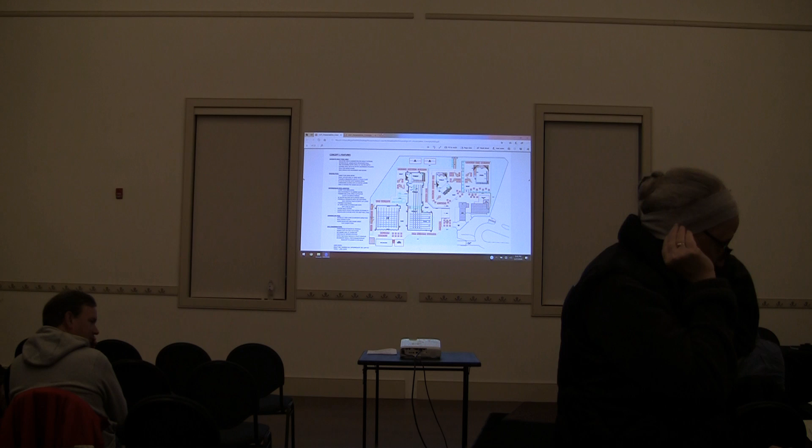That's all. As far as correctly, it was the second Tuesday of every month at 7:30. It's in the township building. I'm there, I'll see it. Come on, we love to have it. Usually when we have these meetings where we talk about approving these, nobody's there, but we'd love to have you come. They are public meetings that are advertised.

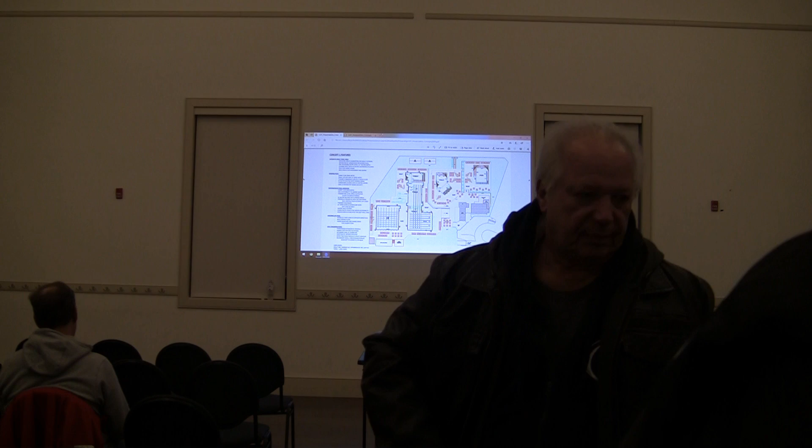I know, the school board says the same thing, no one shows up. It's difficult, because if you think about it as a citizen, I care about our parks, I care about our schools, right? I'd have to be at so many meetings a week at night, it's not possible. So it's rough. That's why electronically, if more can be done to be more transparent, it helps the process. As a township, we have improved with communications over the last period, so you probably will see a lot more than you ever have. Absolutely, yeah, we're getting better.

I want to thank you all so very much for being here. I do have one big announcement I want to let you know. I know this was asked earlier and I didn't address it - bathrooms. We are addressing the bathrooms. We're changing the way we do our regular daily maintenance. We also have hired someone to come in once a week to do a deep clean. In addition...